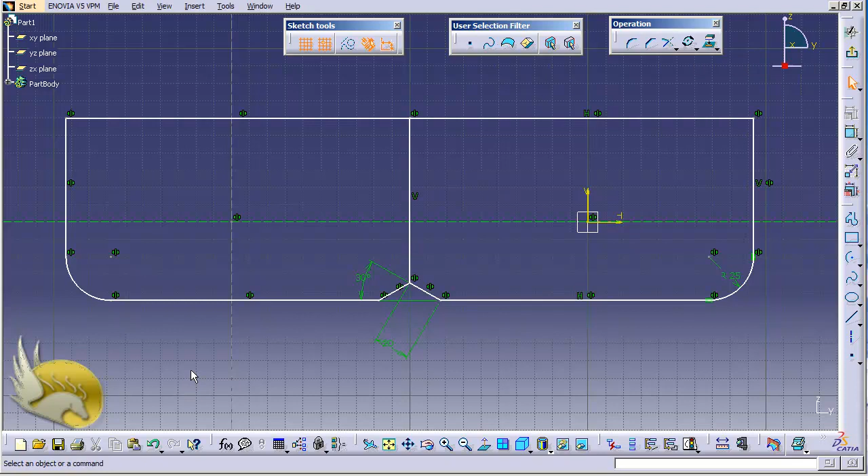Let's pan up a little bit and draw a rectangle here, for example. I want to draw such a simple rectangle. Now this is selected, and I can go and click on the Rotate tool.

The first thing you can see here is the duplication mode. If you want to rotate the shape without creating a new shape, you can disable duplicate mode, and whatever you do will be applied to this shape. But if you want another copy of the shape at a new angle, you can select duplicate mode. I'll do this first without duplication.

First, it tells me to select the center, and the center doesn't have to be on this shape. I want to select it in this corner. That's okay for me. Then it tells me to create a reference line. This reference line is not that important. I can select one of these lines or click anywhere, and you can see this is going to be a handle for your rotation.

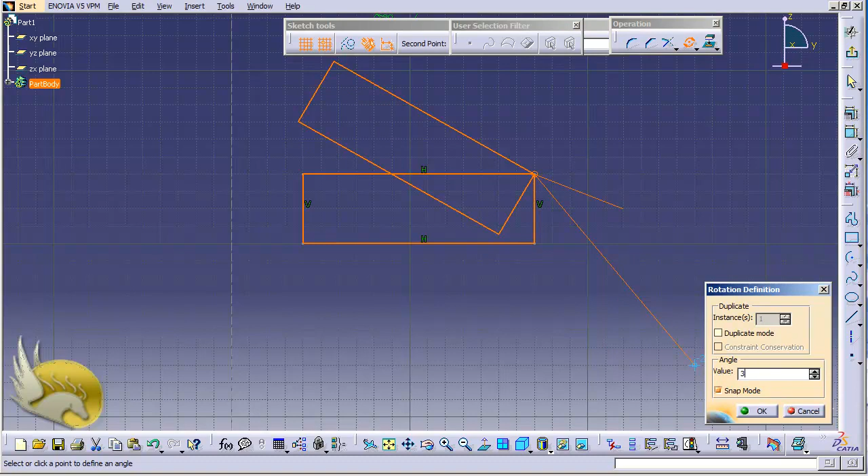For example, here is okay for me. Now that I've selected this, I can use it as the handle of rotation. You can see I can do this manually, or I can type in a value. For example, if I want this about 30 degrees or minus 30 degrees, I can type it in and hit enter, and the shape will be rotated to the degree I asked for. The second thing is duplication mode.

If I want duplication, I can go to the rotation tool and select duplicate mode. I want 3 instances of what I have right here, so I type in 3, and now that I've typed that, I should select the center of rotation. I want it to be here, so this is the center of rotation.

Now I should select an angle or a handle for this. I guess this is okay for a handle, and you can see I can rotate this however I want. Now I want to type in, for example, 60 degrees, and hit OK. I can see that I have created 3 instances of my shape, and each instance is rotated 60 degrees.

Now if I go to the part body and open the sketch, you can see there's nothing about rotation here. This is not a feature, this is just a rotation, so you cannot see anything added to your shape. I go back and press Ctrl Z to undo my rotation, and I want to rotate it again.

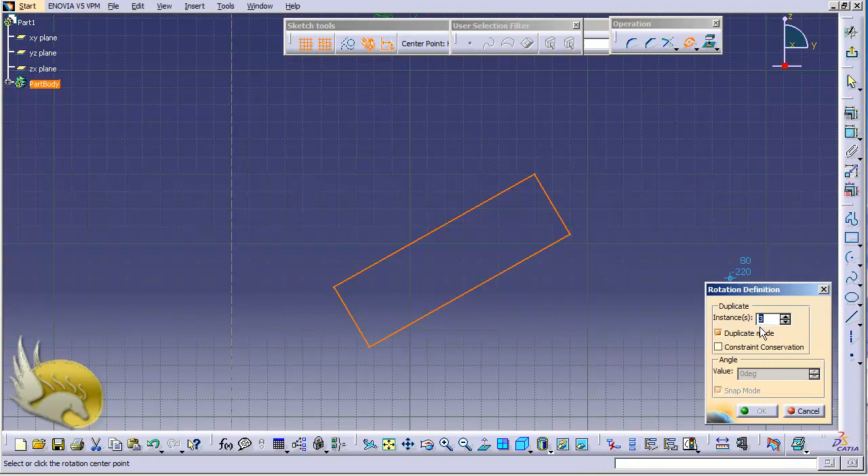Now I want 3 instances, done from here. I want this to be my handle, and I want about 60 degrees. Actually, I want to have 2 instances - this is better. I hit OK, and you can see this is created for me, and this is a nice shape. Okay, now that's the rotation tool.

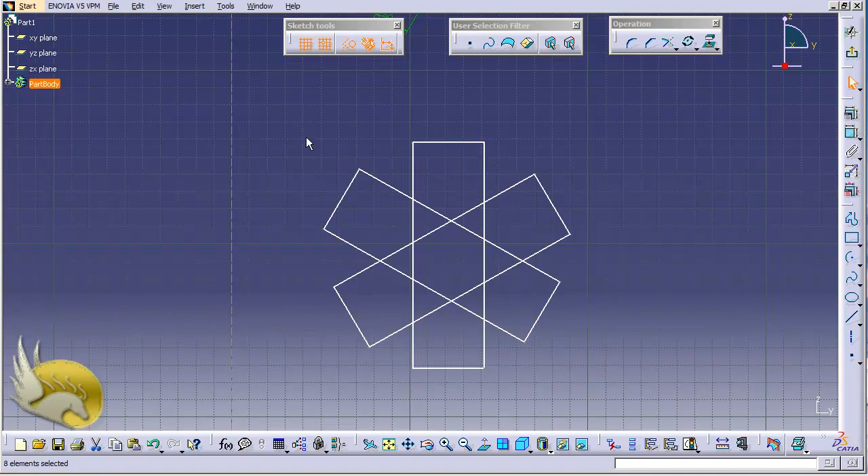If you go and select this shape, you can increase or decrease its size. For example, if I want to select this whole shape, I can go to this tool, and now you can see a Scale option under the operation toolbar, and I click on this.

Now that I've selected scale, again I have the duplication mode. I can do this, and of course there's the conservation of constraint option. I don't want this, so I can deselect it, or it can make no harm to me. It tells me to select the center that will be used as the center of scaling.

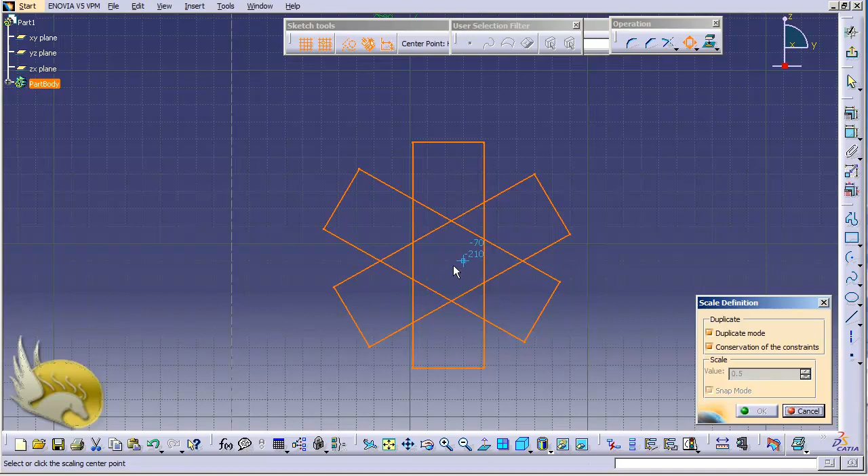I want it to be the center of my shape, so I click here. Now you can see that whenever I drag my mouse right or left without clicking, I can see the scale change. But if I want to assign the scale manually, I can type it in here. I want it to be about 2.5 times bigger, so I type in 2.5 and click OK.

You can see that because duplication mode was enabled, there is now a duplicate of my shape, 2.5 times bigger than the original shape.

Now, using these simple profile tools here, the next thing I want to do is go into the 3rd dimension and create padding, shafting, pocketing, hole, rib, or anything related to the 3rd dimension from my sketches.